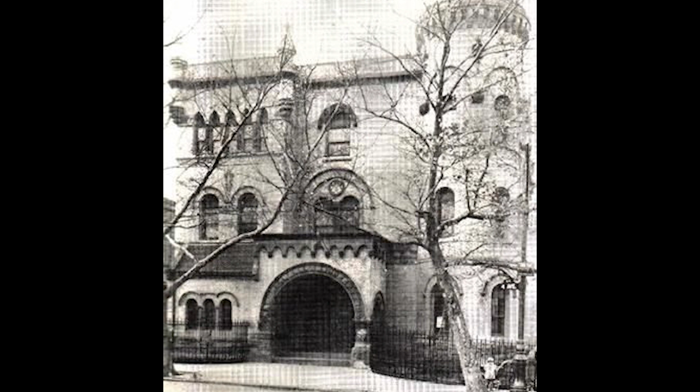While the existing brick facade was linked to a painful past of police mistreatment towards the local immigrant community, I believe the narrative can be repurposed into a positive message, a reminder of the resilience of the local immigrant community for outliving the police precinct, and that the proposed school will embrace diversity and its local immigrant community.

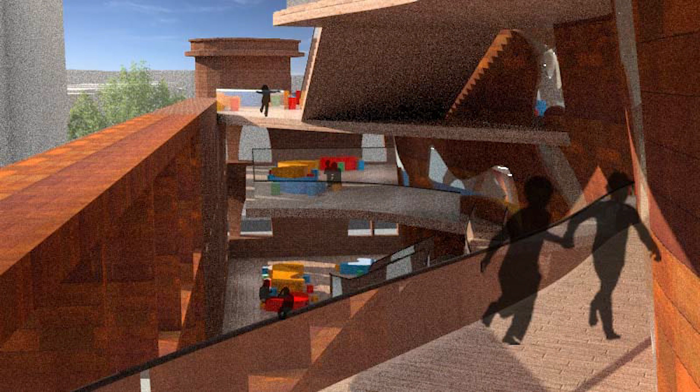I extended the brick facade with Corten steel gates as a way to combine the old and the new, using a material that had similar colors to brick but different textures and feelings. Inside the gates is a mecca inspired by the philosophy of a progressive learning environment where students are excited to spend their days learning, with community spaces for the public.

The way the outdoor terraces interact with the brick facade and the gate, by touching and pushing out onto the sidewalk, speaks to the mentality of confronting the past instead of erasing it as if it never happened.

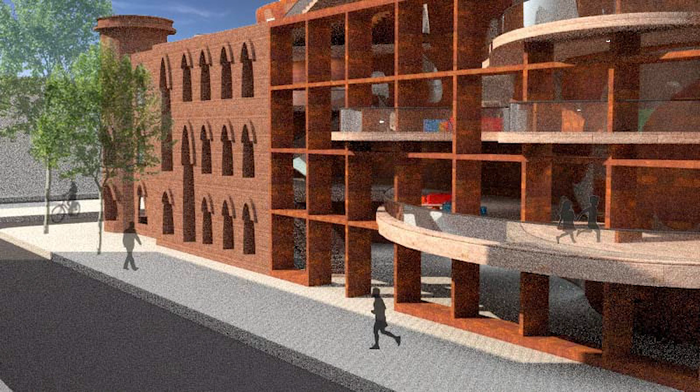The formal language and the school programming was inspired by my site analysis on sounds. When I visited the site, I was aware of the different sounds, like 4th Avenue being noisier than 43rd Street. There were various languages spoken as I walked through the neighborhood, and I remembered that noise level in a school environment was integral to concentration and learning during my time in school.

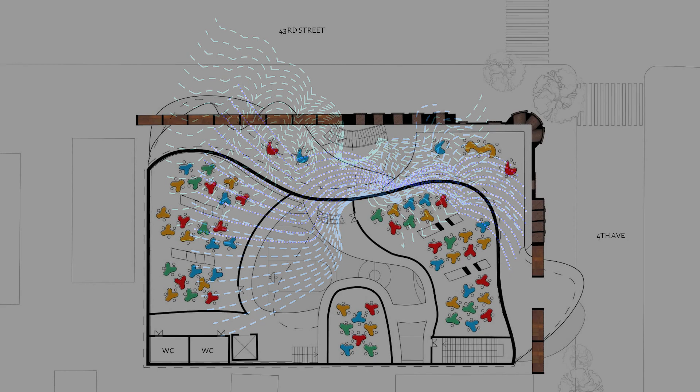I recorded the sounds at different locations near the site and created sound wave art, thus birthing my formal language of organic curves which run through the outdoor terraces and the interior spaces.

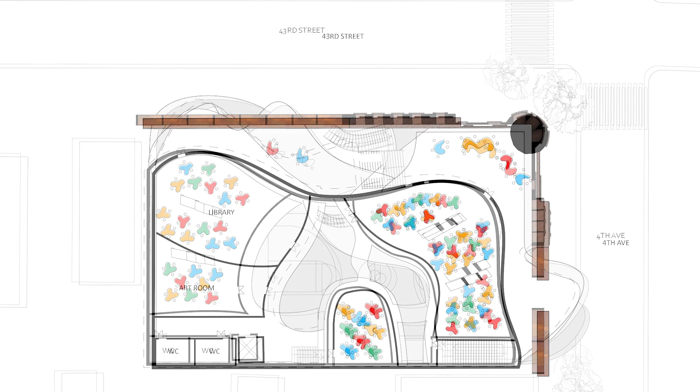Overall, the idea was to design a school where community spaces such as the gym, dining areas, playground, and auditorium were near the lower levels, closer to the noisier street level and thus accessible to the public, while learning spaces were on the upper levels, away from the noisy street.

Another central idea of the school design was the outdoor walkways between the school and the brick facade and wall extensions. They serve as the central circulation system for the school, so students can get a breath of fresh air and enjoy the outdoor weather when it's nice outside.

Dispersed throughout the outdoor terraces are breakout spaces, which can also serve as dining areas and outdoor classrooms in the event of another pandemic. I created organic cutouts in the Corten steel facade and the walls of the learning spaces using the formal language as a strategy to let in natural light while making the spaces much more stimulating for children, contributing to better focus while learning.

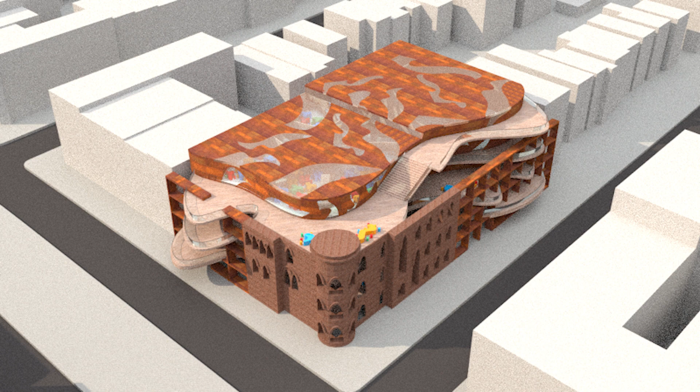While I chose Corten steel for the school facade and the brick wall extension, I chose wood for the internal walls and rubber flooring for the learning spaces, in an effort to control noise.

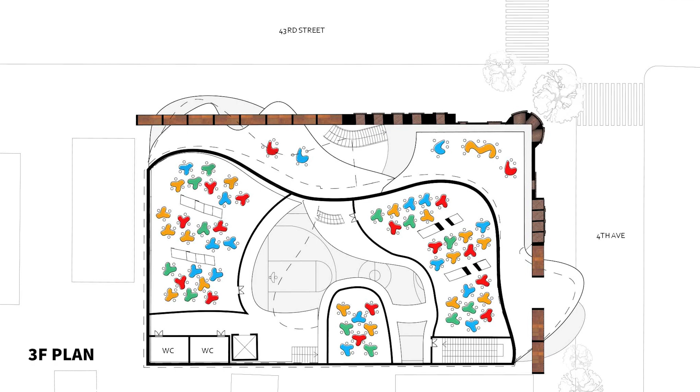Learning spaces are larger communal spaces with 3 classroom modules and flexible furniture that can be set up for individual study spaces or group discussions. Even the window cutouts in the walls and facade, and the furniture separating the classroom modules, can serve as seating spaces for individual study.